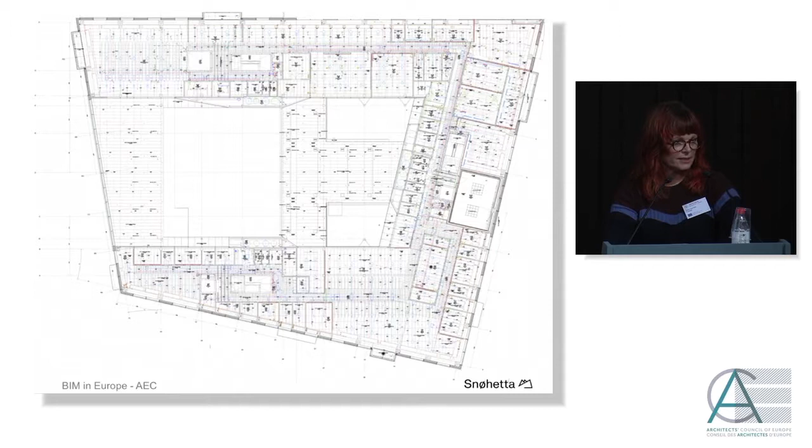This is a ceiling plan. That's where all fields meet. We know it's some of the most complex items we have, especially in an art and design school, with over 200 systems, a lot of machineries that need to interact.

There are of course many challenges to overcome during design. Today I will focus on some of them. First of all, I've already mentioned it, it's the information flow - no limits and new tools. So then the question is, how to manage the amount of information? How to enable us to chop it up into manageable work packages? How to create steady and constant workflows that deliver products that are conclusive and irreversible.

In the KMD project, our focus has been: we want to optimize the input from the specialists, a highly competent engineering and design team in a high-cost country. We want to make sure that we get the right product at the right time.

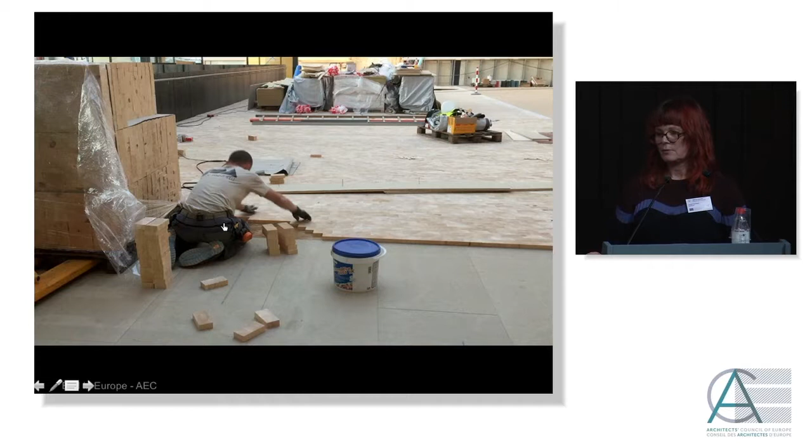Let's start with a small film. Do I press this again? Okay.

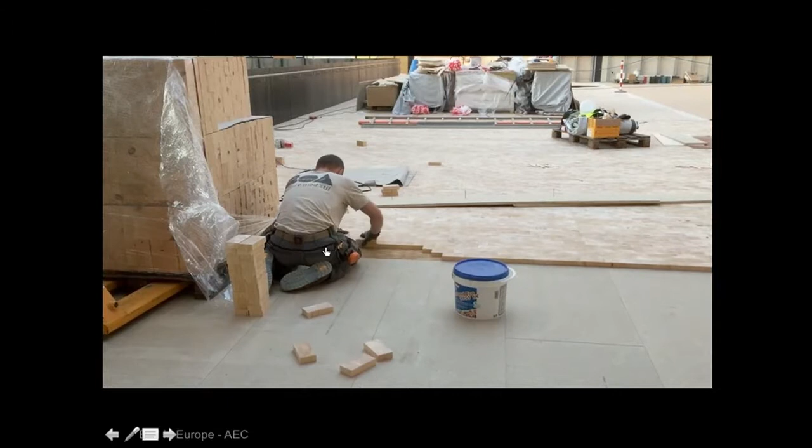This is our wooden block floor in the KMD project - 140,000 blocks, 70 by 140 millimeters. It takes a lot of effort. You need to know your trade, you need to know what comes first and what comes last. You also need to interact with others. For example, this hall has a ceiling height of 23 meters - nobody can work above you when you are kneeling.

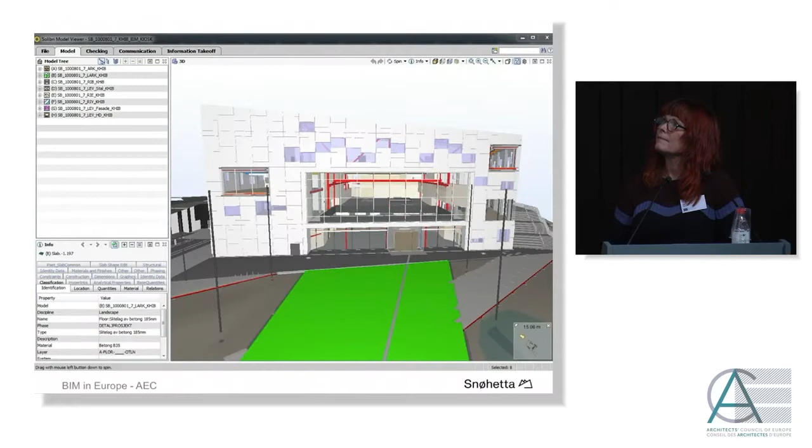This is our BIM model. The wooden block floor has 140,000 pieces. Our cross-disciplinary model for Snøhetta, for the engineering fields of electro and ventilation, had altogether 100,000 items - a complex model to puzzle together. We will talk more about how we decided to go ahead.

In the KMD project, firstly, we demanded all participants work in the same tool, a Revit model. Secondly, we demanded all participants have the same goal. We were all focusing on the same effort to fill in the BIM model, and I say this now for the third time in this lecture, with cross-disciplinary and quality-checked information. It sounds easy.

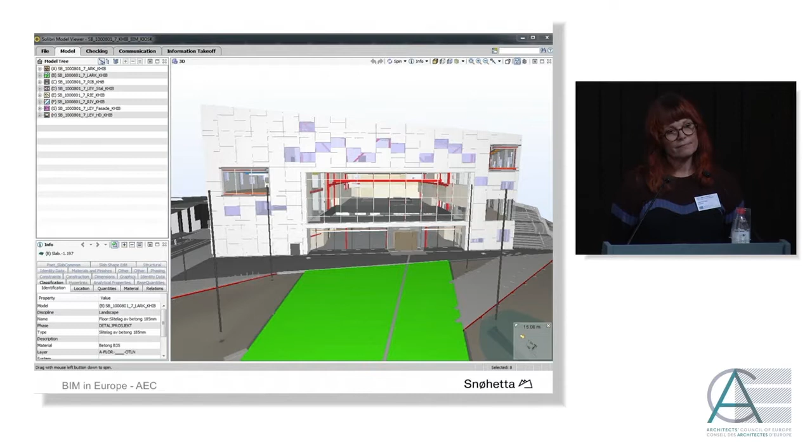Our main objectives were: first, in the design phase, we wanted to create flow efficiency instead of resource efficiency. And why? The more you're able to control before you start construction, the better. Investment in thorough and cross-disciplinary quality-checked design pays off on the construction site.

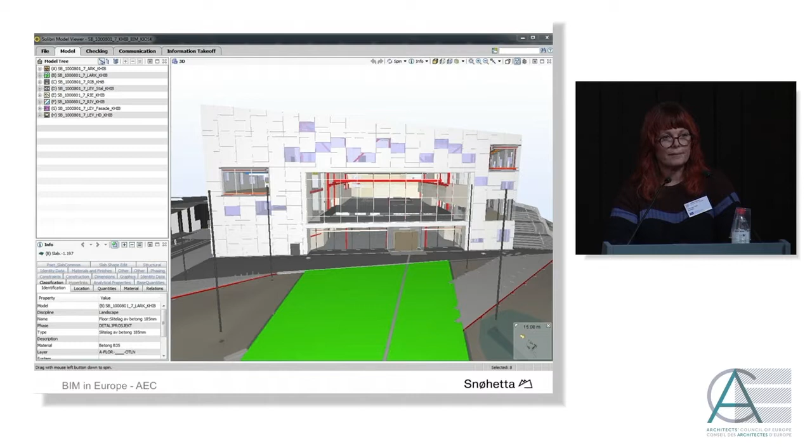Secondly, in the construction phase, we wanted to create flow efficiency once again, plus execution control. And why? Execution control means to be prepared and to know what comes when. Mistakes in construction cost us all losses, poor quality, and rework.

So this is our BIM model. We're going to start and we're going to deliver.

This lecture will focus on the design phase in KMD, and only that. We have already talked about all participants having the same goal, the BIM model, and we have talked about focusing on flow efficiency instead of resource efficiency.

For the BIM model as such, we want a process that gives us, one, a steady and continuous value adding into the model; two, cross-disciplinary, quality checked information from start to handover. How?

We decided to look at design as a production line, based on the philosophy from lean industry. As a design group, you will start with an empty shell, and you will fill it from that point until it's complete.

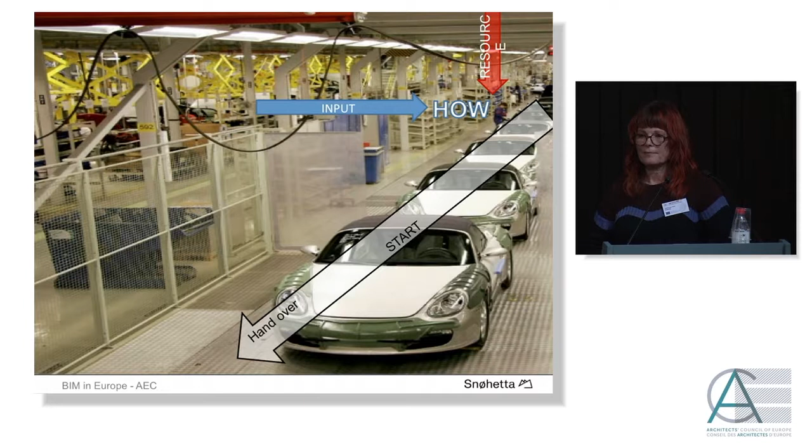Well, we can say the input is egg, milk, salt and sugar. We could say the resource is the gourmet chef. Why not? And the activity, that's something you would add in a special takt. And the procedure, that must be then the recipe, huh?

So then you're finished. So what have we made? A cake? Egg and milk? Good. And the chef, he's a well-known Belgian chef.

His name is Peter Goossens. He has a 3-star Michelin restaurant. He must be able to make something really good, I think. So we have the activity that has been adding.

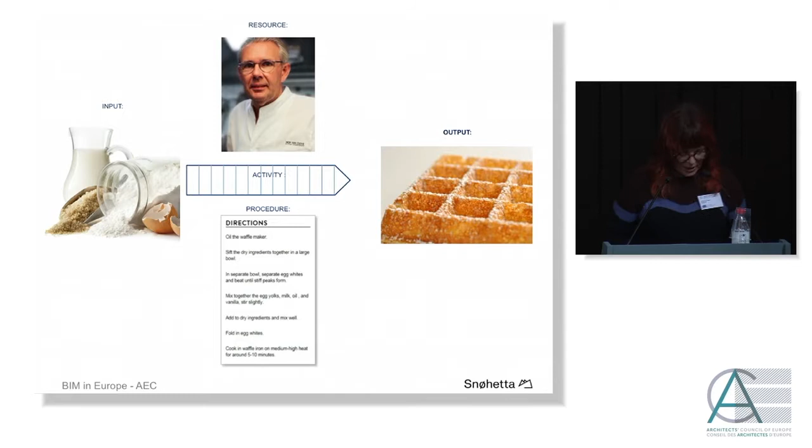Coming back to our BIM model, actually the same procedure. You have a continuous input to your model, you have some activities you add, and you have a final output.

We have resources, and there are resources that are the highly competent design team. They can add activity into the model in order to get the final output. But then comes the question,

how do we know the recipe? How do we define the directions? What to do when?

You see the BIM model, it starts with an empty shell. It's going to be finished. That's the final output. It's going to go through 3 waves - that's the building site, the procurement.

Remember the picture where everybody was running? How do we avoid chaos in iterative processes, in creative processes?

Remember, we have a highly qualified team. They are the best, for sure, but they also cost a lot of money.

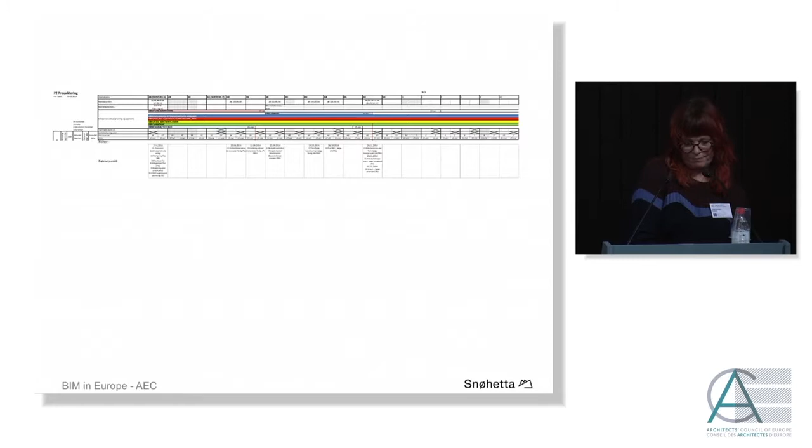So, as a team, we are now - I have to jump a little bit because I'm talking too slow. I normally don't do that, but that's okay. Let's see, I will jump till here.

This is a simple way to illustrate matrixness in a BIM model. To the left, you see a coarse mesh. And some of the items here are items you don't change.

At this point in the project, actually the building site is almost about to start. The foundation works will start in 6 weeks. The structure will start in 3 months.

And then you know that if the shafts, the staircase shafts, are made out of concrete, you have to understand the fire escape rules. So you see the green line to the right in the coarse model is the fire report. It needs to be finished at that time, and you don't change it afterwards, because if you change it, you will build wrong.

So the BIM model moves from being a coarse mesh, like the skeleton in an elephant, and we move from there into the more detailed phase of cross-disciplinary information, still without changing any of the parameters from the first wave. The last part is actually the part where the team only adds information that's not cross-disciplinary.

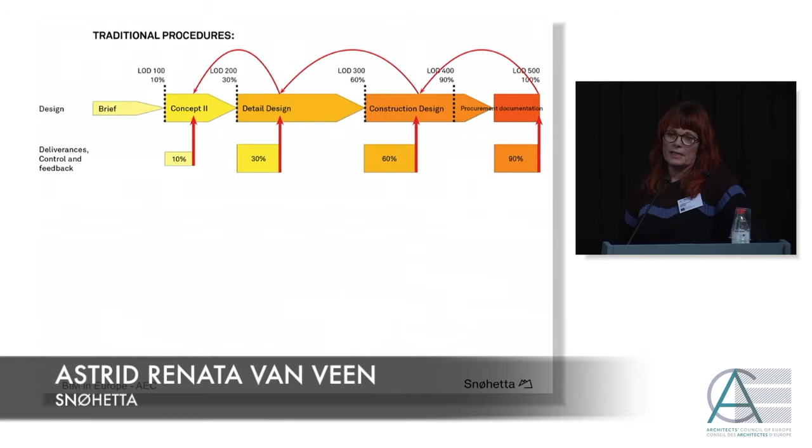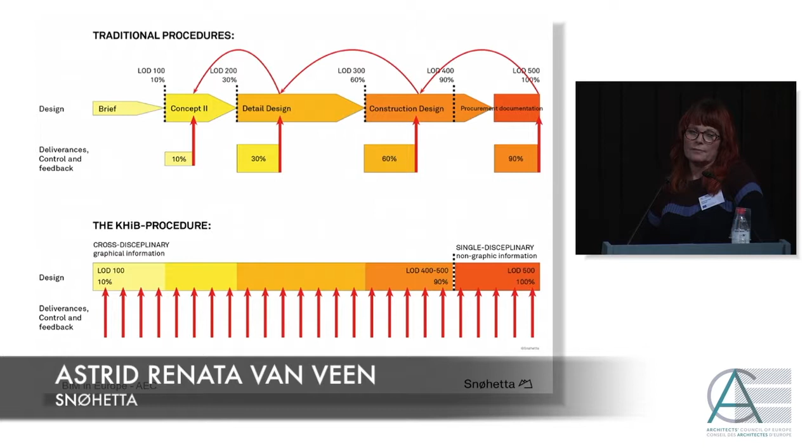What we have done in the KMD project is to chop off. We have been looking at the whole design from A to B as one continuous flow, not having huge chunks to evaluate. We have been chopping it up with a 14-day interval. We call that a takt.

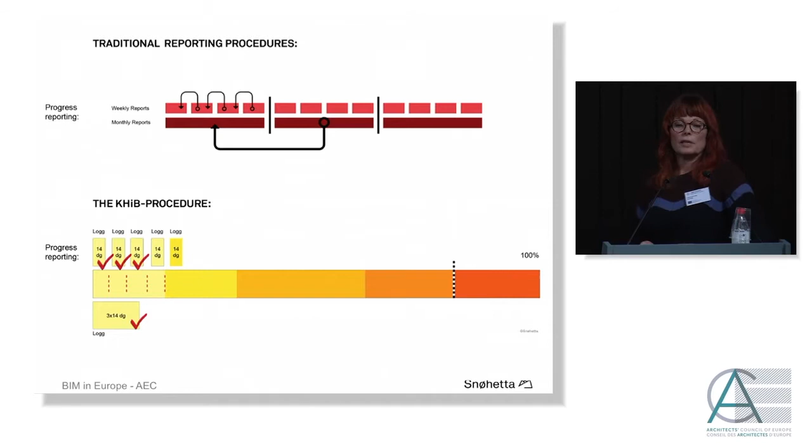And even more important, the client needs to be there. So the client needs to evaluate on a 14-day basis, not like we often experience, that they come back 3 months or 1 month afterwards, and you have to restart the whole design. You are never, ever able in complex processes to actually cross-check everything at that level. So this is a very important principle of how we have worked in the KMD project.

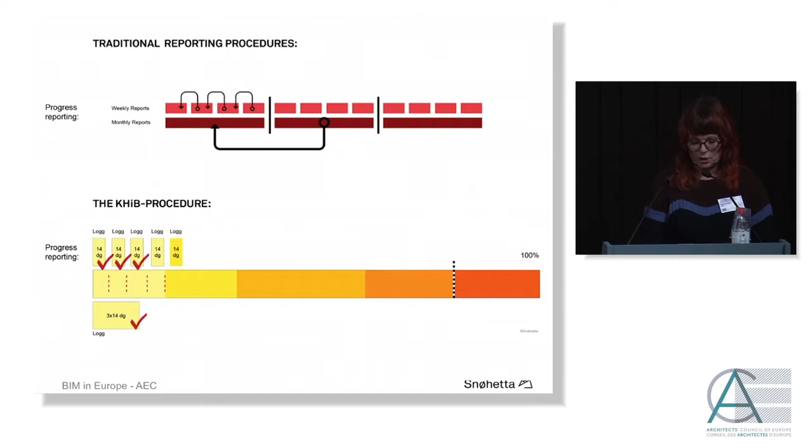Very central here is the highly valuable design team. There's a lot of experience, a lot of expertise in the design team as such. And to break down and to be able to control the information flow, this is where it happens.

Everything I've been talking about till now is strategical. Now we are down to the design team - it's the MEP engineer, it's the fire engineer, it's the architect - they are the ones who know the detailed information. Working in a takt, as we have been doing, it sits in that group to ask for the right type of information. We have been using - I'm doing this fairly quick, I can come back and give a long lecture another time - we have been doing this through logs.

Remember, I was talking about that we wanted to, or perhaps I didn't say it, but an important thing is to avoid waste, because we do cost quite a lot of money. One of the things we have done is that we have not used one single minute on resumes. We have only been using logs. We have asked for information through a table, sitting around the table, pulling information into the BIM model.

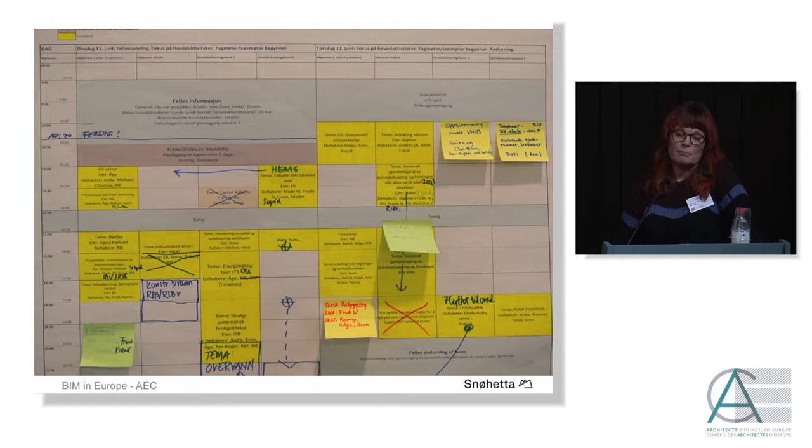And when it comes to clash controls, we are doing it, yes, but actually the quality doesn't sit in the clash control. The quality sits in you enabling to put the information in the model. Our experience is that very often you don't find any clashes because the information is not in the model. Even more important, clashes actually don't show what's not drawn. So to make sure that you get what you need, you have to actually visually control the model.

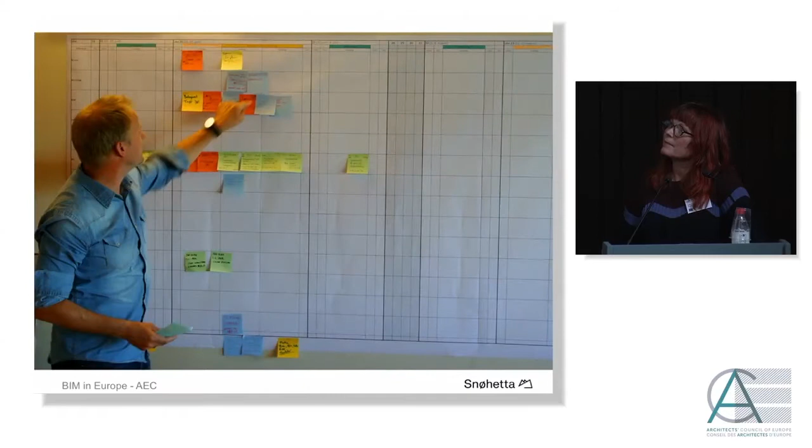I have to jump this. So,

I think I will end this lecture talking a little bit about values. Three core values. Transparency.

Transparency means that everybody can observe and understand each other. Observing what others are doing and letting others observe what you are doing will contribute to making each other better. For example, plans, overviews, and suggestions should be made big, visible, and easy to understand. We all have the same objective, and we are all working on the same project. So everybody needs to be able to see the same. Transparency means that the project progress is always visible.

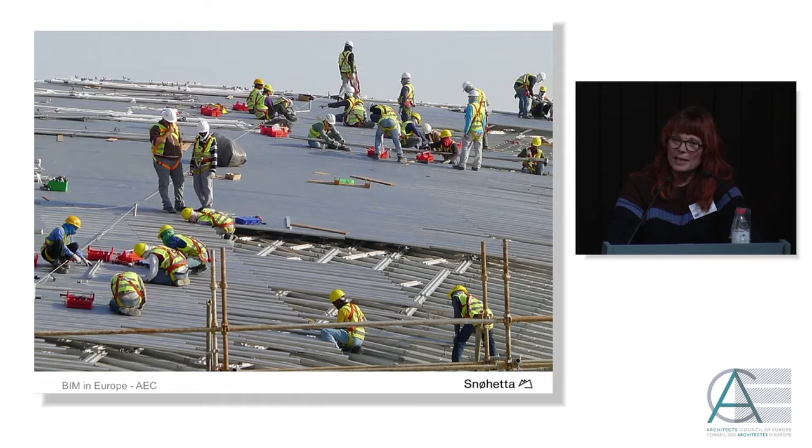This is a building, a picture from mounting the roof for one of the pebbles on King Abdulaziz. It looks rather chaotic. We are back to the first picture with everybody running. It's hard to say if there's a structure there. It did come up, but it could have come up in a smoother way. We need the road signs. We need the key points to structure our work.

And our motivation has been a desire to optimize the input from every one of the specialists, being highly competent as a design team. In every project, and in the complex ones in special, we want to make sure that we get to deliver and to receive the right product at the right time.

Based on the learnings from the KMD project, Snøhetta has now established their own method, tailored for iterative and creative processes. We have named the method Snowflow. Our platform is based on the understanding that the strategy behind using BIM is more important than the tool itself. The core values are transparency, delegated ownership, and added value for all parts.

In order to control your output, you have to structure your input. Snowflow is a mindset, enabling us to run smoother and more structured processes.